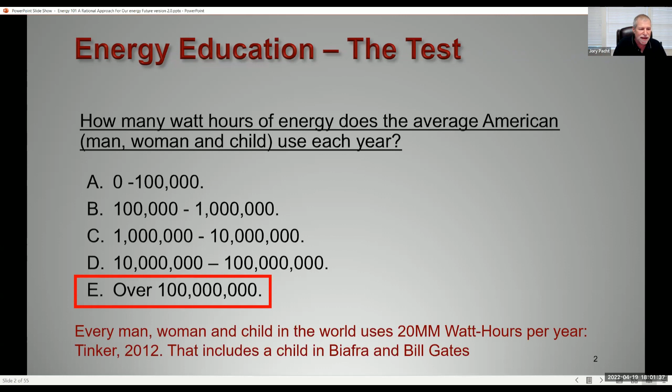Well, chances are you probably got it wrong. The answer is over 100 million watt hours per year. In fact, every man, woman, and child in the world uses 20 million watt hours per year. That includes a child in Biafra, and that includes Bill Gates. So why is that number so big?

Energy is in everything we do. Food for a family of 4 for a week takes the energy equivalent of 22 gallons of gasoline to grow, transport, and sell. Everybody has a pair of blue jeans. A single pair of blue jeans will consume the energy equivalent of 3 gallons of gasoline to create the raw materials, manufacture, transport, sell, and wash.

Everyone takes energy for granted. We get in our cars, we think about the amount of energy we use because we watch that gas pump dial up numbers as we're filling it up. But we don't think about the amount of energy used to build the car or to build and maintain the road.

Well, if energy is in everything we do, then the cost of energy is in everything we do. And most decisions worldwide on energy are based in cost. Increases in the cost of energy affect every part of the economy, and those increases hit the poor the hardest.

Well, the reason you didn't think my test was very impressive is because we live here. And I guess some of y'all live out here. But what if you lived here? Africa is a continent of 1.2 billion people, and it's dark.

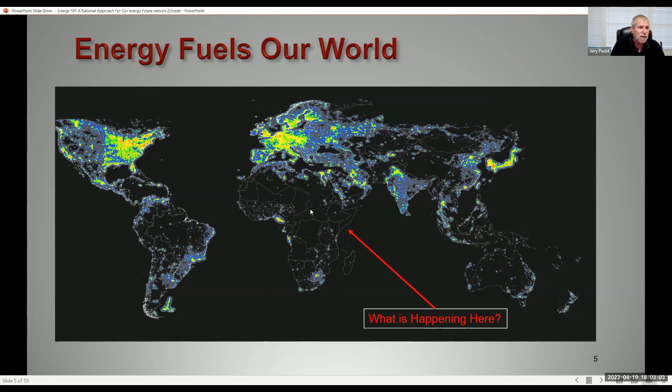What does that mean as far as prosperity? Well, we can look at Latin America, we can look at third world countries and look at their poverty levels based on how much energy they have. You can see that Latin America is largely 100% electrified. There's a very small portion of the population in poverty. Now, this is poverty defined by the UN as living on less than $3.10 a day.

Asia is a little spread out, and this chart is actually old. China, India would be right up here now. So you can see we still have pretty high levels of electrification. Look at sub-Saharan Africa: low levels of electrification and high levels of poverty. In fact, we can draw a straight line from poverty to electricity.

Now, it's easy to think that this is just a third world problem. None of us live in sub-Saharan Africa after all. But in truth, 1/3 of the population in the United States has been considered energy poor, where they've had a strain to pay their electric bills. And in fact, 20% of the American population has had to choose between energy and food or medicine.

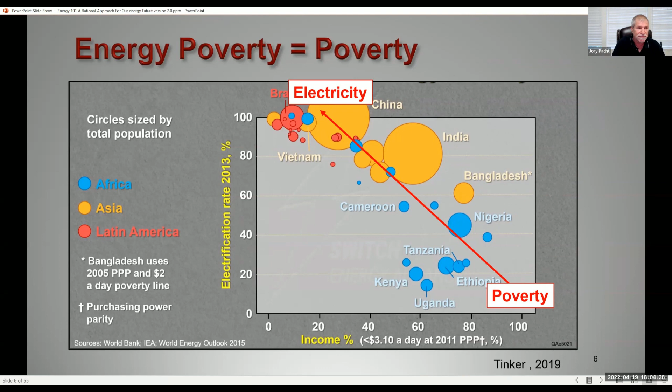So what does reducing energy poverty mean? Well, some things are obvious. Hunger - you can plow a field with a tractor instead of oxen. Clean water - you can drill a well and pump water instead of getting it from a polluted river. But what do I mean by clean cooking?

All of us cook with one of two things: gas or electricity. But what if you don't have gas or electricity? You cook with what's available. Now, for much of the world, what's available is wood and brush. And actually in Africa, there's a lot of childhood respiratory problems. These people are in a hut all day in which cooking smoke is being emitted.

What if you don't have wood? There are many areas in Africa that are completely denuded of trees. Again, you use what's available, and what's available is animal and human waste. Now, I'm sure you all had a good dinner, but you might want to consider how good that dinner would be had it been cooked with poop.

So what if we could light up Africa? What if you've never seen your friends or your family at night except by firelight and moonlight, and now you do? Wouldn't that be magic?

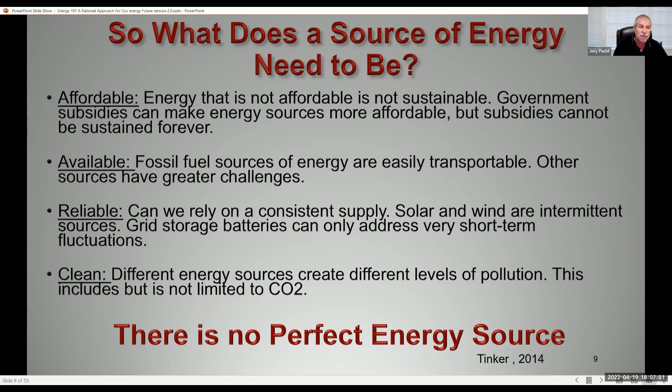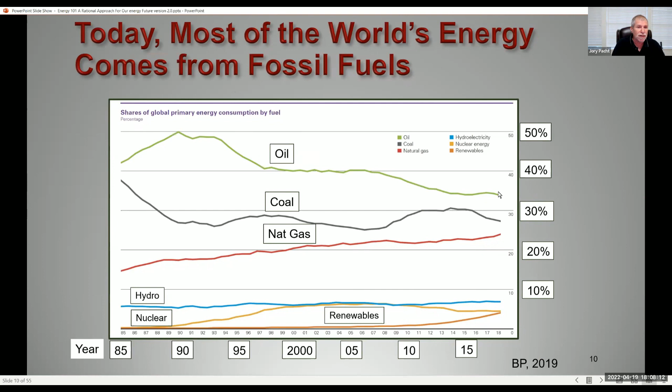Different sources of energy create different levels and different types of pollution, including but not limited to CO2 and methane. There is no perfect energy source. And today, most of the world's energy comes from fossil fuels. You can see here that only about 4.5% of the world's energy comes from renewables, wind and solar. Oil is up here the highest, followed by coal and natural gas.

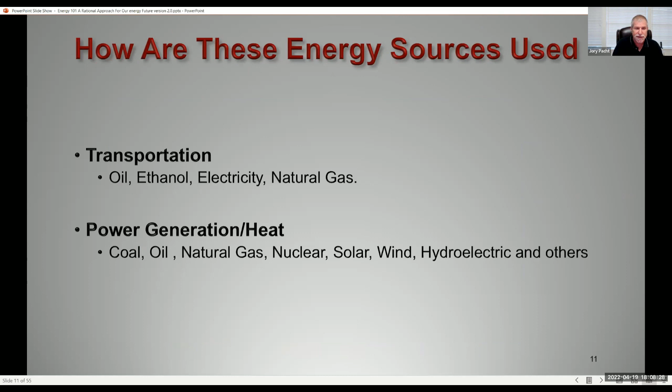So in order to look at the different energy sources, we need to look at how they're being used. And when we talk about oil, we're really talking about transportation. Why do we use oil for transportation? Because it works. You can see when we look at batteries, they're very heavy relative to the amount of energy they produce. Gases are both light and don't produce a lot of energy per unit volume.

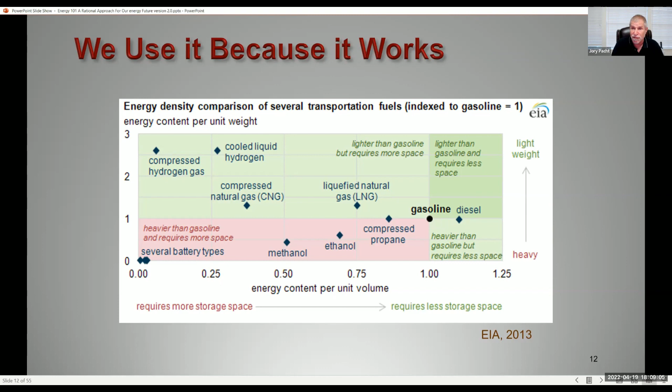But gasoline and diesel are right here in the sweet spot. Think about it: you can fill up a Honda Prius and take 4 people 55 miles at 60 miles an hour in comfort on 1 gallon of gas. That's really quite something.

Now, you've heard a lot of talk about electric cars, but we need to understand what that actually means. The batteries that power electric cars do not arrive from an alternative universe. They take a lot of metals and materials.

A guy named Herrington did a study and said to convert all the cars in the United Kingdom to electricity by 2050 would require the world's entire production of neodymium, 3/4 of the world's lithium production, and at least half the world's copper production. I took his numbers and said, okay, there's a lot more cars here in the United States, so what would it be to turn all our cars electric? It'd be 1.7 times world cobalt production, 3 times world neodymium production, and 2.6 times global lithium production.

One battery requires us to mine and process 250 tons of material. But let's say we could snap our fingers and convert all the cars magically to electricity. Would we reduce carbon? The answer is no.

Jürgen in 2021 said we'd only reduce CO2 emissions by 5% because we're using today's energy mix. Gillingham, in a more recent paper, said the conversion to electric cars would actually increase emissions. That's due to a couple of things. One is we still use fossil fuels to build all the materials that go into those cars.

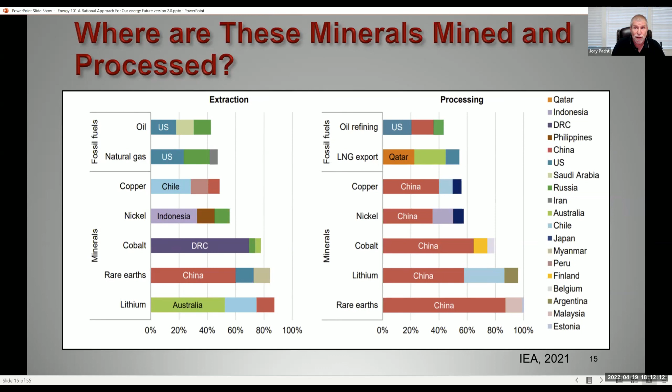Now we're seeing right now the results of Western Europe being dependent on Russia for their energy. Do we want to be dependent on China for our energy? And the other question is...

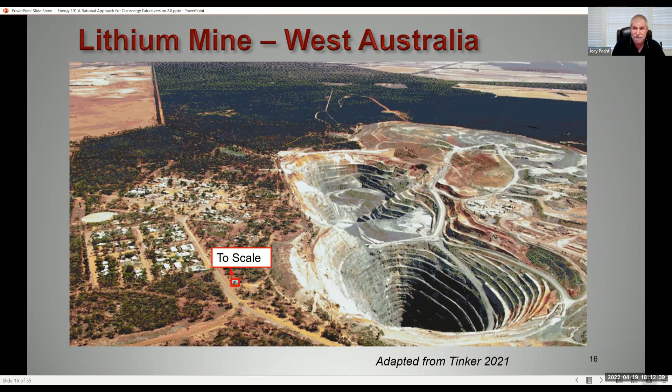There's also another side that people don't want to talk about, and that's the dirty side of clean energy. 50% of the cobalt in the world comes from one province in one country, the Congo.

And it's not mined according to modern OSHA standards. There are large mechanized mines run by the Chinese, but there are also over 15,000 artisanal mines where a bunch of Congolese actually get together and start mining. And they use kids for obvious reasons—everybody has to work, and kids are small, they can get into tight crevices.

Now there's a lot of NGOs in the Congo, and you'd think they'd be against this, and you'd be wrong. The Congo is so poor that these mines provide an important source of income for the Congolese. If you want to know what energy poverty looks like, take a good look.

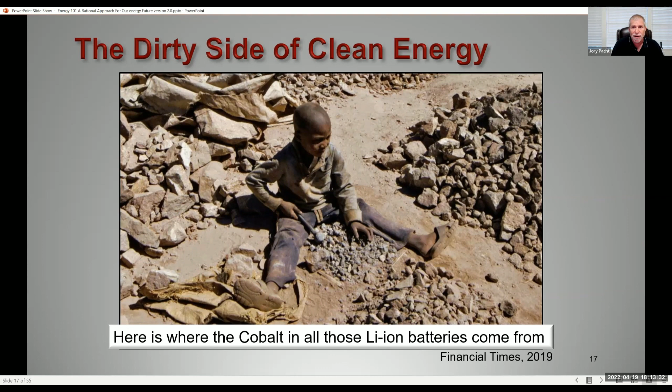Now we can switch to electricity, and electricity is unique—it is the only commodity that's consumed the moment it is created. Again, we can go back to batteries. In order to store all of the electricity the US uses in one day would take the entire output of the Tesla Gigafactory for 500 years.

And storing energy is not cheap. According to JP Morgan, it costs about $18 a barrel to purchase an oil storage tank. But to store the amount of energy equal to the energy in 1 barrel of oil would cost $510,000, based on a $300 per kilowatt cost of a Tesla Megapack.

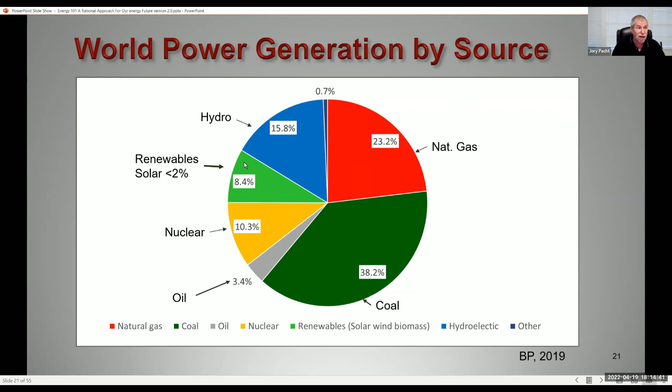Let's look at each one of these materials used in generating energy, talk about their pros, and talk about their cons.

Coal is available, abundant, affordable, and reliable. It is the most abundant and cheapest energy source in the world, and it's the easiest to mine and process. That's why it has been the dominant energy choice of developing countries in Asia. In fact, coal usage has increased over 5 times in Asia during the past 30 years.

India accomplished an economic miracle. In the year 2000, 2/3 of Indian homes were without electricity. 20 years later, there's only 31 million homes without electricity in a country that has 1.2 billion people. Their per capita GDP tripled as a result of electrification. But they did it using coal. 75% of their electricity comes from coal.

China is the biggest user of coal in the world. They currently have 993 gigawatts of coal-fired capacity, and they're adding another 259 gigawatts. In fact, they just announced plans to expand domestic coal mining by 300 million tons a year and to build up a 620 million ton coal reserve. China sees coal as a strategic material.

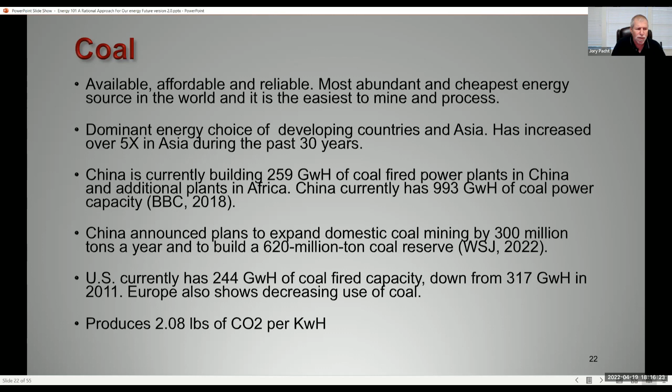Natural gas is abundant, affordable, and reliable. It's got an efficient transportation infrastructure. There's lots of pipelines. And it's relatively clean. It produces about half of the CO2 per kilowatt hour that coal does.

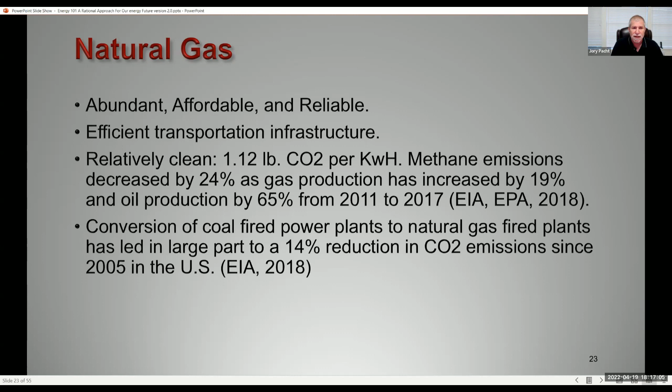We've heard a lot of talk about methane emissions, but they've decreased by 24% as gas production has increased by 19% and oil by 65% from 2011 to 2017. And in fact, we've seen a 14% reduction in our CO2 emissions since 2005 as a result of switching from coal to natural gas.

The other thing that's happening is we're looking very closely at carbon capture, and there's been some significant advances in this field. The biggest one is the Allam cycle.

Traditional power plants all use fossil fuel to heat water, create high pressure steam, and combined cycle plants also use gas to turn a turbine. Now, the problem is they're inefficient. Normal steam power plants, coal and natural gas, are 42 to 47% efficient. Combined cycle plants get up to 55% efficiency, but most of the heat is lost up the smokestack.

The Allam cycle plant uses oxygen to heat CO2 to a point which becomes a supercritical fluid. They use that supercritical fluid to drive the turbines. As it turns out, supercritical CO2 is much better at driving turbines than steam. And so the plants are 62% efficient, and they postulate they can get that up to 73% efficiency.

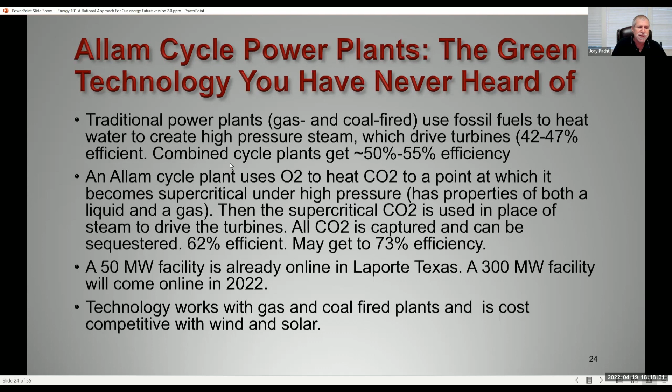There's already a 50 megawatt facility online in La Porte, and a 300 megawatt facility will come online late this year near San Antonio. The technology is cost competitive with wind and solar.

Dan Crenshaw once said, if you're not serious about nuclear, you're not serious about global warming. Nuclear has it all. It's affordable, reliable, and clean. Zero pollution of any sort. Our long-term issues are with storage of nuclear waste, and certainly there are countries we don't want to have nuclear reactors.

But France gets 75% of their electricity from nuclear power, and they're the largest electricity exporter in the world. They solved their storage problem. Right now, they store it in an above-ground facility, but by 2030, they'll have an underground facility that will safely store radioactive material for 100,000 years. And they recycle 96% of the fissionable material.

Sadly, it's not been politically possible to build new nuclear plants in the United States. And in fact, most are reaching the end of their service life. The average age of a nuclear plant in the US is over 40 years. Ones in France are newer, safer, and better. And there's some major new innovations coming in nuclear, most notably small modular reactors, which run on passive cooling.

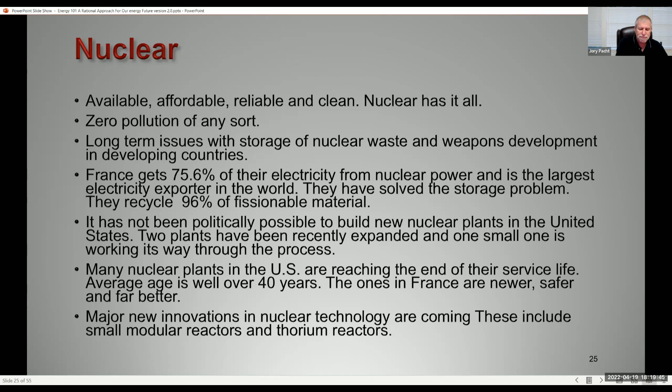Biomass is the biggest scam going. It's affordable and reliable, but there's only so many trees, and it puts 9% more CO2 in the atmosphere than coal, in addition to a whole host of other pollutants.

What the sales pitch is for biomass is, well, you grow this tree and it produces all this oxygen, so when you burn it, it's a zero-sum game. But nobody asks the question, what if you don't burn it? If you don't burn that tree and allow it to naturally decay, much of the carbon is recycled by microbes, fungus, insects, moss, etc. And that which is not recyclable by plants and animals is stored in soil as humus. That's your future coal.

Hydro is great where you have it. The State of Washington gets 68% of its power from hydro plants and exports a lot of power to California. But where I live, it's a bit flat. For good hydro, you need steep mountains and lots of rain. That works great along the west coast of Oregon and Washington, not so good here in Texas or in Kansas or many other areas.

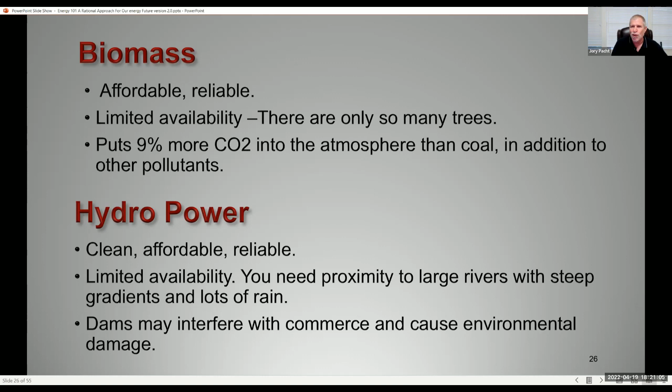I'm going to talk about wind and solar with the same slides because they both have the same advantages and the same disadvantages. They're clean, but they're more expensive than other energy sources, even with government subsidies. And they're both intermittent sources. Wind only works when the wind blows, solar only works when the sun shines.

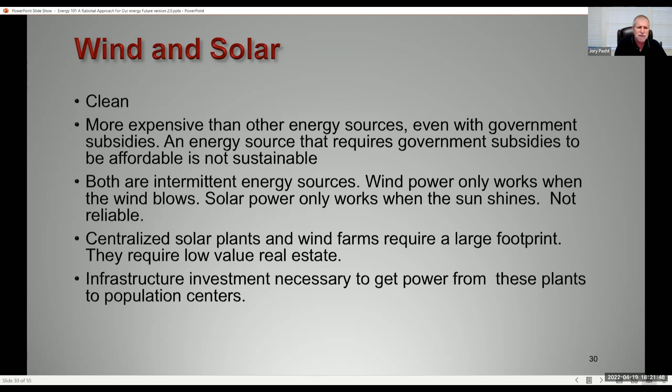The other thing is that centralized solar plants and wind farms require a large footprint. They require low value real estate. And it's necessary to develop a lot of infrastructure, i.e. high tension power lines, to get that power from these areas of low value real estate to large city centers.

So I asked myself the question, how big does a solar plant need to be to power Greater Houston? Well, the Ivanpah power plant, which I use as an example, is in the Mojave Desert, and it supplies electricity to 140,000 households. Greater Houston has 2.3 million households, and the solar radiation is less. I also had to account for the fact that residential use is only 38% of total electricity use. So the size of that plant is 403 square miles, or pretty much the size of Houston.

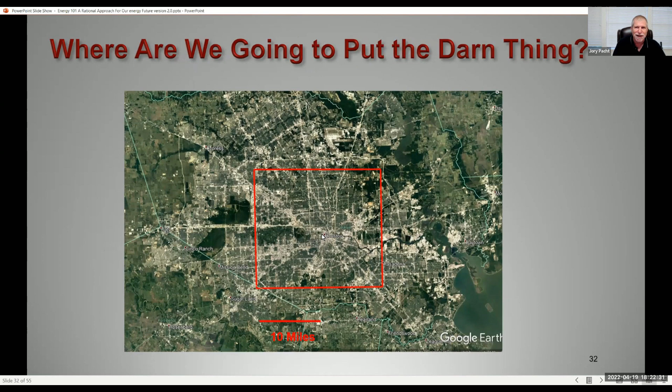I live here, I'm okay. All these people here, they're gonna have to move. So where are we gonna put the darn thing?

Now, what about wind? I don't have to go to California and talk about wind. Texas has more wind energy than any other state. And the reason is large portions of Texas are flat, windy, and empty.

So I looked at the Buffalo Gap Wind Farm. It has a nameplate capacity of 523 megawatts. What do I mean by nameplate capacity? That means when all the turbines are running full blast, that's how much power it'll produce. But the turbines don't run full blast all the time. And so the average capacity is about a third of that, or 174 megawatts. So at average capacity, it's only providing electricity for 58,000 households.

And one of the things that happens in Texas, for those of you who don't live here, is there's two things that happen. In summer, it gets really, really, really hot. And two, there's a high pressure system that sits over Texas and the wind stops blowing. The result is not only in 2019, but also for a very short time in 2021, we had summer electricity shortages, and the price of electricity briefly zoomed up to over $9,000 a megawatt. The same thing happened, of course, during the Texas freeze, but in that case, we also lost our gas plants as well as our wind. And so the gas plants could not keep up.

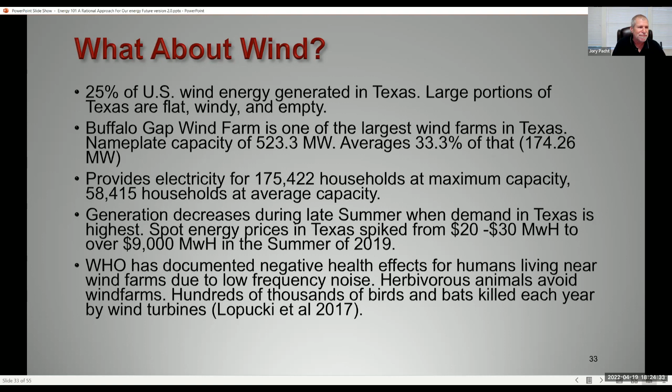The other thing that's interesting is a lot of people are for wind energy as long as it's not next door. California has stopped permitting wind farms because of all the legal issues. And New York had to pass a law to require wind farms to be permitted, regardless of whether the residents wanted them or not. But the biggest issue is a wind farm takes even more acreage.

This is the Buffalo Gap Wind Farm. It's 108 square miles. Basically, you're using about an acre and a half per household.

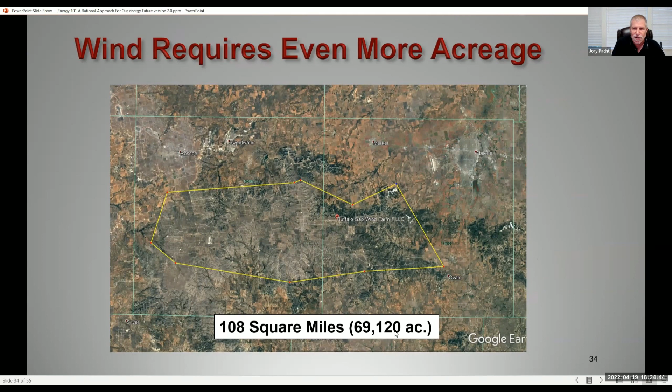Now, what about rooftop solar? I looked at what my bill would cost to get 50% of my electricity from rooftop solar. Right now, I pay an average bill of about $325 a month. Well, the cost for installation of solar panels for half of that is $45,500. The government, in its infinite wisdom, will write me a check for $10,500. So my cost is only $35,000.

Well, I figured, okay, what's the monthly payment on a $35,000 note for 20 years at 5% interest? That was $230.98. So I can either pay my $325 a month, or half my electricity bill plus that $231 note, or about $75 more per month. Now, I'm 70 years old. I'm not getting on top of my 2-story house to wash those solar panels off. So there's also the yearly maintenance, which is about $600 a year, which I did not include.

And of course, not everyone lives in a single family household. My kids live in apartments. They can't choose solar energy.

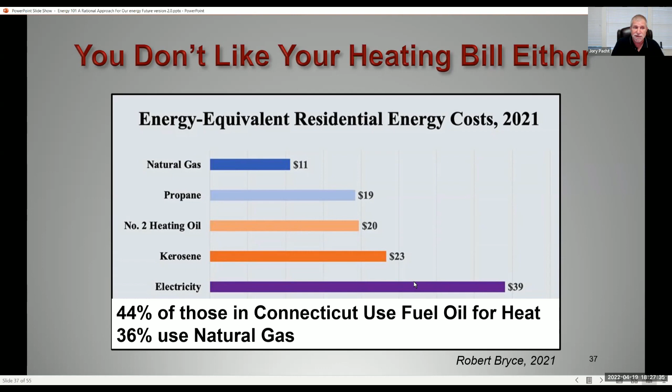They simply don't have enough gas to be able to provide Connecticut and the adjoining state of Massachusetts with the gas to create enough electricity. The result is they actually are importing LNG from Yemen, and until quite recently, they were importing it from Russia.

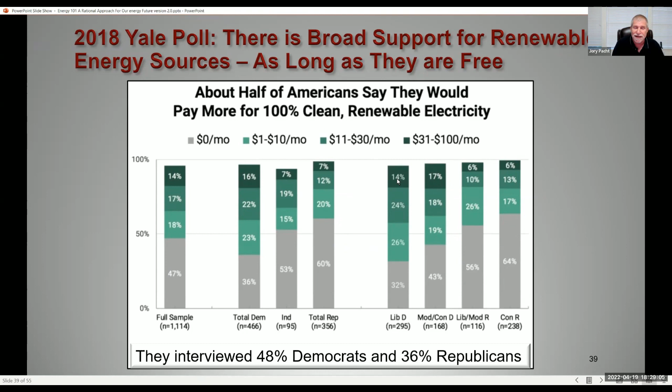Well, can we scale wind and solar? Today, wind and solar don't make up for the global growth in energy consumption. There's what we call in the oil business, the creaming curve. We drill prospects in the best areas first, and we've done the same thing with renewables. We built solar plants in the Mojave Desert, and we built wind farms in the middle of nowhere, Texas. But additional locations will be more expensive, there will be more litigation, and it'll be suboptimal.

Other thing is we keep coming back to this tricky issue of metals. All photovoltaic systems currently on the market are relying on one or more raw materials characterized as critical or near critical by the EU or the US Department of Energy. That includes polysilicon, indium, beryllium, gallium.

They're naturally scarce. And in fact, we keep hearing about the cost of solar panels going down. Well, that was actually true because China was cornering the market. China now has 80% of the PV market. They've done that, and now prices are going up. The cost of solar panels is up 18% in 2021 due to a 300% increase in the cost of polysilicon.

Now, this is something I've just started looking at and I'm really fascinated by. In 2013, a group of authors in Germany looked at energy return versus energy invested. So in other words, if you build a nuclear power plant and you include the cost of mining uranium, refining the uranium, transporting the uranium, and building the plant, et cetera, you still get 75 times more energy than you put into it.

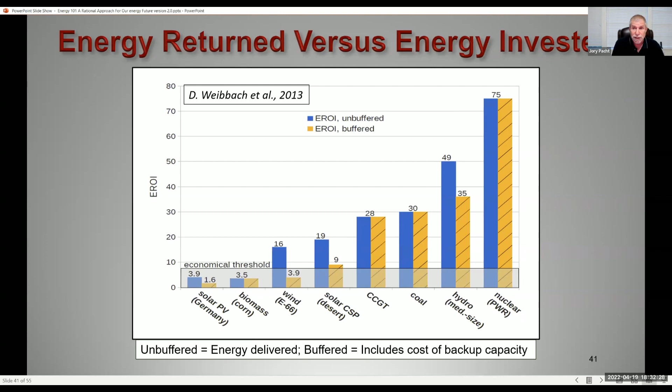So I've not done the research to determine what the carbon budget is of a buffered solar plant, but my guess is pretty much 1 for 1. You're not saving, you're putting so much energy into manufacturing, and so much of that manufacturing is based on coal that you're really not putting any less carbon in the air.

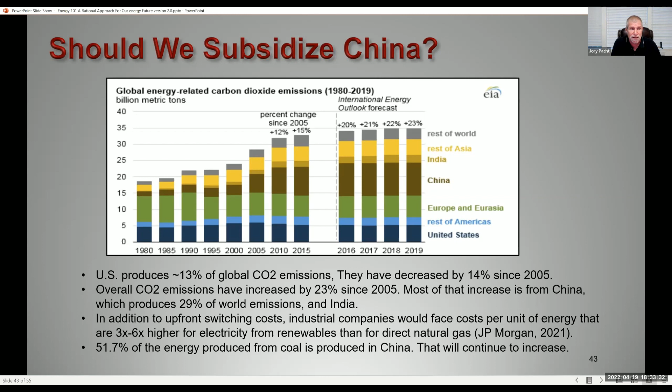And watch out for India. Remember, I just said India now is fully electrified. And guess what? When people have electricity, they want more of it. Indians are now getting well enough that they're going to want cars. So you're going to see a large growth in carbon emissions from India.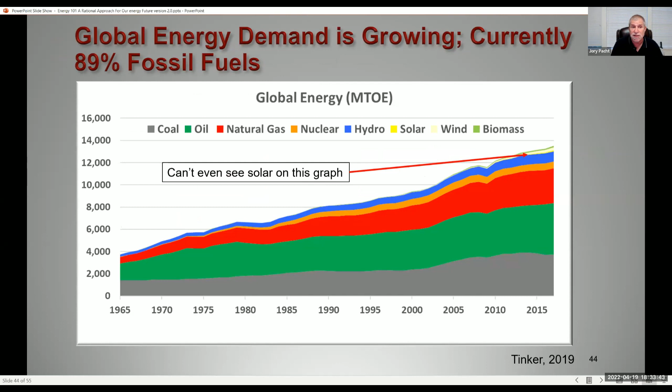So let's look at where we're at today. Global energy demand is growing. And again, as I said in earlier slides, currently 89% fossil fuels. Can't even see solar on this graph. And the EIA is predicting a 50% increase in the use of energy, almost all in Asia.

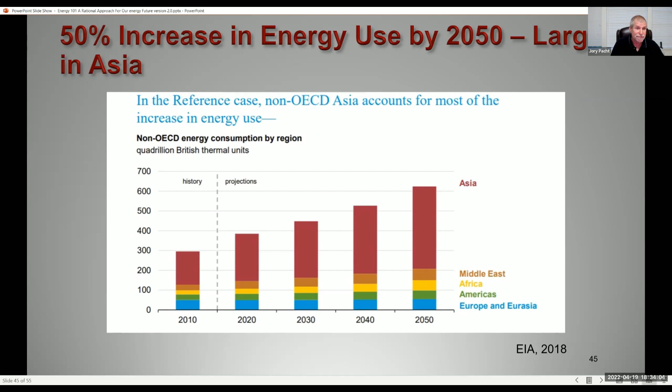Population is increasing too. And you can look at Africa. We expect Africa's population to double by 2100. So let's take that graph I showed you earlier. That's where we're at now.

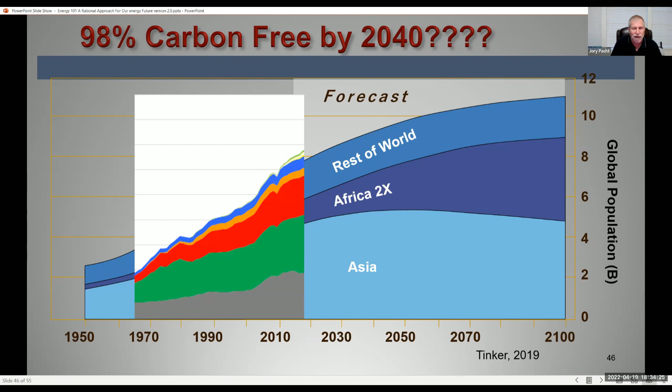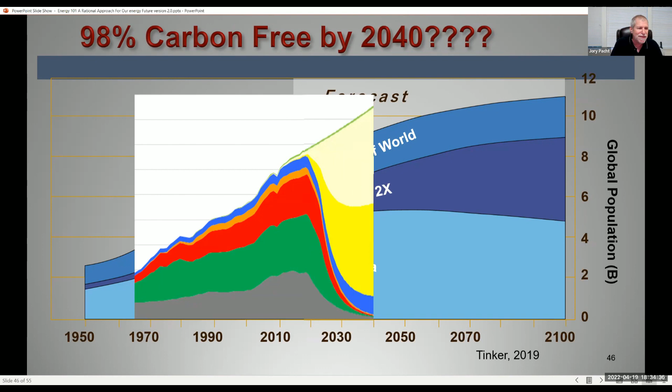Now we keep hearing we want to be carbon free by 2035, 2040, 2050. The number keeps changing, but the message is still the same. What does that look like? That looks like that. Does anybody think that's realistic? Anyone?

This whole thing started with an inconvenient truth. So I want to put out a few more. It's not technically possible to move to 100% carbon-free energy in the near future. It's not politically possible, and it's not economically possible. In my own opinion, it is inhumane to deny developing and undeveloped countries the benefits of clean energy, cheap energy that we have enjoyed all our lives.

But it doesn't matter what I think. We're not going to go to war with China or India over the amount of coal they use. And they're going to continue to use coal as long as they see a competitive advantage in doing so. So what is realistic?

Well, Scott Tinker basically said that we can reach crossover, that is between foundational fuels of coal and oil, in the next 50 years if we increase nuclear energy by 3 times, double natural gas production, and increase renewables by 5 times. Now, Tinker said these things in 2012, and with the exception of nuclear, we've actually done that. Sadly, we're going the opposite way with nuclear.

We're decommissioning our power plants. They decommissioned the Indian Point plant in New York, which produced 15% of New York's power in 2021. Where's that energy going to come from? It's being imported from places that largely burn coal. And in fact, even the National Renewable Energy Laboratory agreed that more gas generation is necessary and more natural gas use is necessary.

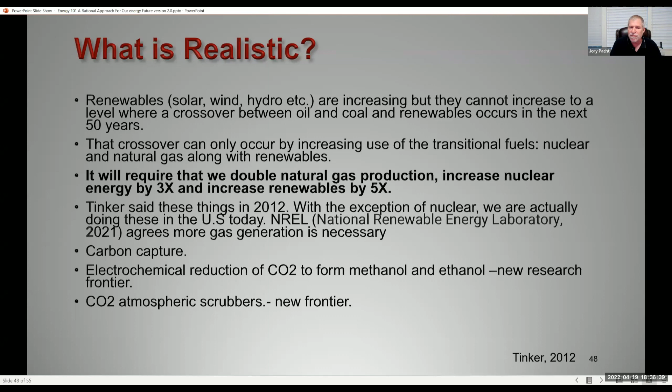And there's, of course, some exciting things on the future. We looked at the Allam cycle technology. We're also looking at methods to actually scrub CO2 from the air. In fact, they're being employed in the Permian Basin by Oxy right now.

Here's what we shouldn't do. New York refused to permit new pipelines. And so the utilities said, well, we can't install new hookups for customers because we can't guarantee supply. And the former governor, Cuomo, basically said, no, you have to allow people to hook up anyway.

So the plan is to transport natural gas by truck. Well, first off, that's going to increase CO2 because of the emissions from the trucks. But the other thing is, does it ever snow in New York? Well, New York's famous for its blizzards. And if the New York Thruway shuts down, people are going to freeze.

There's an assumption among many that if you shut down pipelines, people will just walk away from multi-billion-dollar investments. And that's not true.

The Keystone Pipeline was shut down with the assumption that they wouldn't mine for any oil out in the tar sands in Alberta. Well, what's happening instead is the government of Canada is building an extension to the Trans Mountain Pipeline. They'll ship that oil to Vancouver, and then by tankers to ports along the West Coast in Asia. And of course, not only does that increase CO2 by tanker shipment, but it greatly increases the chance of an oil spill.

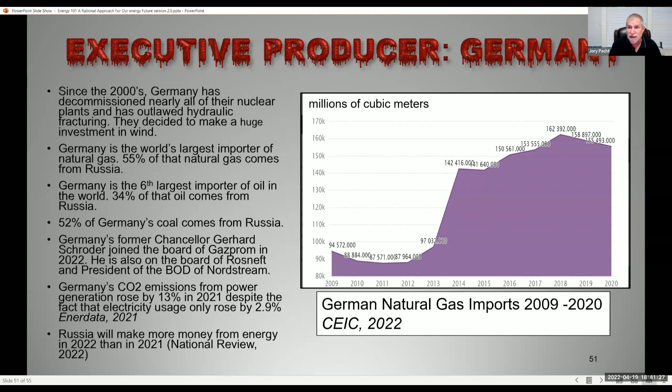We need to be in what Scott Tinker calls a radical middle, what I call the rational middle. And part of the problem there is there are no simple answers. Oh, there's lots, make no mistake, there's lots of simple answers. Sun good, oil bad. That's a simple answer. Global warming is a hoax. That's a simple answer. The problem is both those simple answers are wrong.

And of course, H.L. Mencken said it best: for every complex problem, there's a simple answer. There's an answer that's clear, simple, and wrong.

It's going to take a lot of thought and a lot of multivariate solutions to balance our energy use and our CO2 emissions. The bottom line is the Earth will get hotter and we will adapt. And with that, I will take questions.